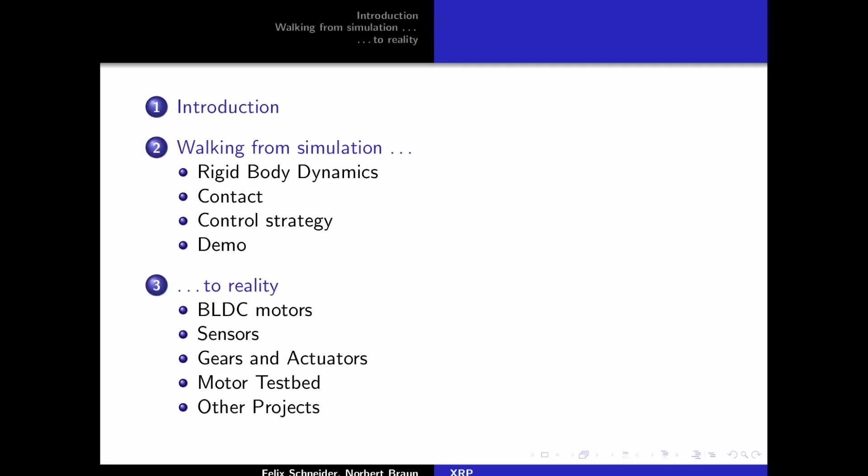The talk is separated into two main parts. In the first part, I am going to talk about walking in simulation. That is, we take a physics engine, build a model of the robot and try to get it to walk in the simplified physics with a few simplifying assumptions. And then in the second part of the talk, Felix will tell you about how we might eventually move from simulation to reality.

So this project is about building a life-size humanoid robot. And for the next years at least, we are going to focus on the legs. Arms might come eventually, but only much later.

There are, as was mentioned already, quite a few projects that are already working on this, but none of them are really fully open. So we try to make a fully free project, which is both open source software and open hardware. Also, we try to completely document the development process. The goal will be to have state-of-the-art software as far as that's possible, because software, of course, is easy to copy. And for the hardware, we try to focus on something that is manufacturable with moderate resources.

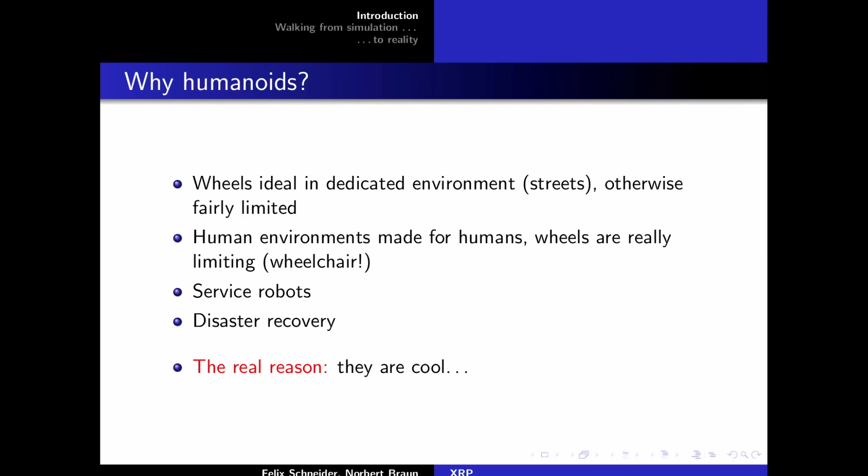Well, why would one want to have a humanoid robot at all? Wheels are, of course, good in dedicated environments. If you're on the street, you're not going to beat a wheeled robot, no matter what you do. On the other hand, human environments, such as this room, are really limited if you're on wheels. So, for example, there are stairs over there, you couldn't get on the stage without climbing stairs. So there are many reasons why wheels might not be so ideal.

If service robots eventually do become commonplace, these environments may change, but then at least if everything goes wrong and there is a disaster, you really need to have some alternative to wheels. But of course, for us, the real reason is that we saw these videos from Boston Dynamics, and we probably all saw them and we thought that's really cool. It's unfortunate that the military is doing it. Let's try to do something similar ourselves.

Well, it seems that the progress on humanoid robots after several decades is finally heating up. On the other hand, the big company players like Boston Dynamics and Schaft, which are now both owned by Google, are really secretive. So they publish YouTube videos that are really exciting, but don't really tell you anything. And there seem to be no scientific papers or anything.

There are also university projects that do publish papers, but still they don't actually publish usually source code, they don't publish CAD drawings, and they're not really intended for you to copy their hardware. They are scientists and they write papers, and that's about it. And the other problem is, of course, that existing robots cost on the order of several $100,000, which is completely unaffordable for a hobbyist. Now, our dream at the moment is to get this down to maybe a few €1,000, which is still a lot, but possibly affordable for a small group of people or hackerspaces.

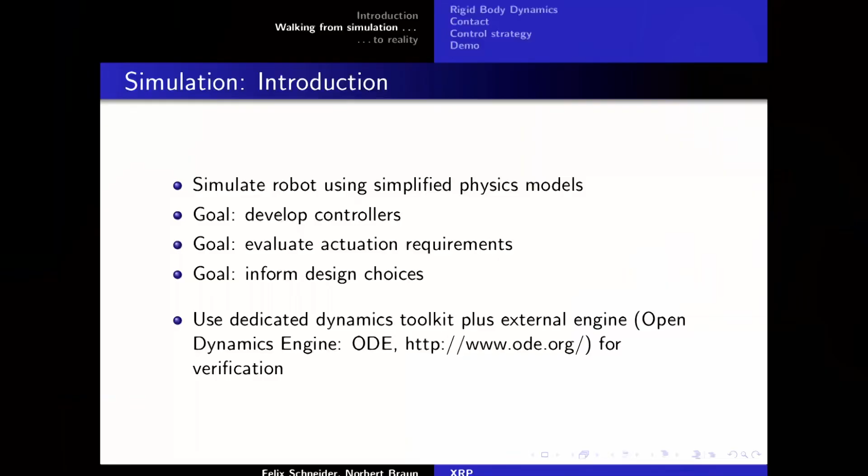So how do we simulate a robot at this point? This is really the basics of all the game physics engines you may know, such as ODE or Bullet. The central concept here is that of a rigid body, a physical body assumed to be completely undeformable. It can't bend, it can't flex. As a result, the mass distribution is completely condensed into 10 parameters, and this thing has 6 degrees of freedom. Except for those 10 parameters, the simulation engine doesn't care how the mass is distributed. This only matters for collision detection, not for actual dynamics.

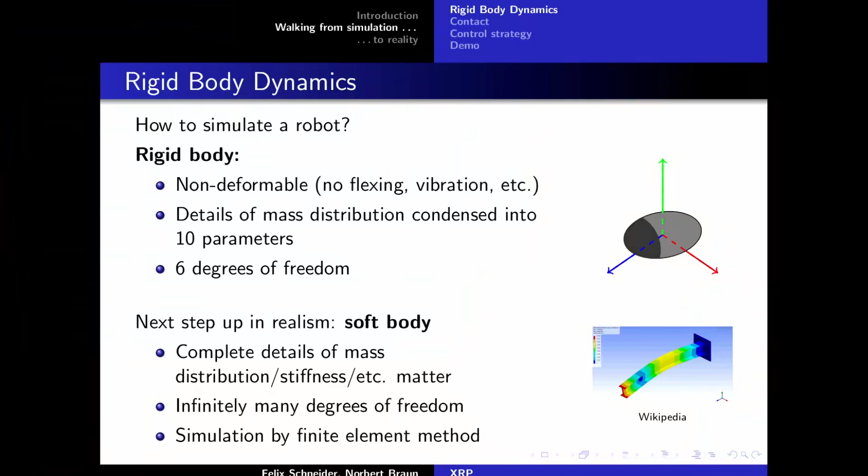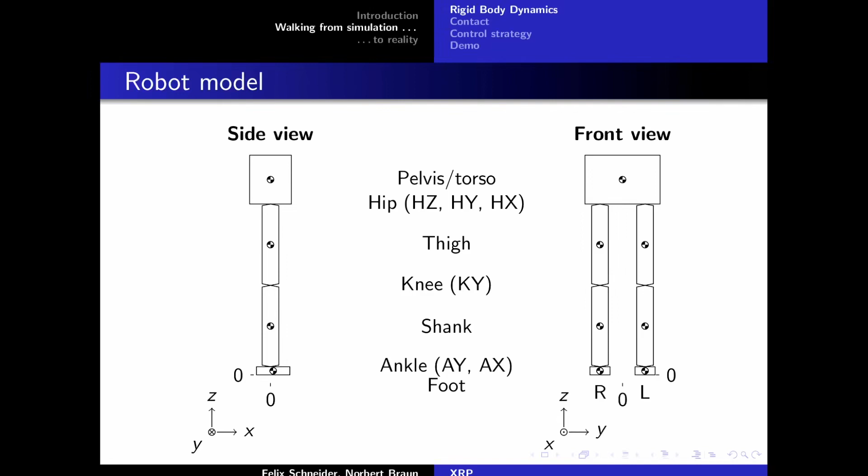So our robot is simulated as a collection of rigid bodies. This is the model we use at the moment. It consists of 7 rigid bodies: the torso, which is just one piece, and 2 legs. We have 6 degrees of freedom per leg - 3 in the hip, 1 in the knee, and 2 in the ankle. The advantage of this is that the rigid body that is the foot also has 6 degrees of freedom, so in this configuration we can essentially control the position and orientation of both feet, but not more. At the moment, this is sufficient for what we want to do.

Now let's come to controller design. Why is this even a hard problem? If you've seen 3D animated films, you might think this is really easy, or at least reasonably easy. Here's an industrial robot and a biped, and there's really a lot of work on industrial robots - the last talk was on this. What's the main difference? The main difference, as you see here, is that the industrial robot is bolted to the ground with rather large bolts.

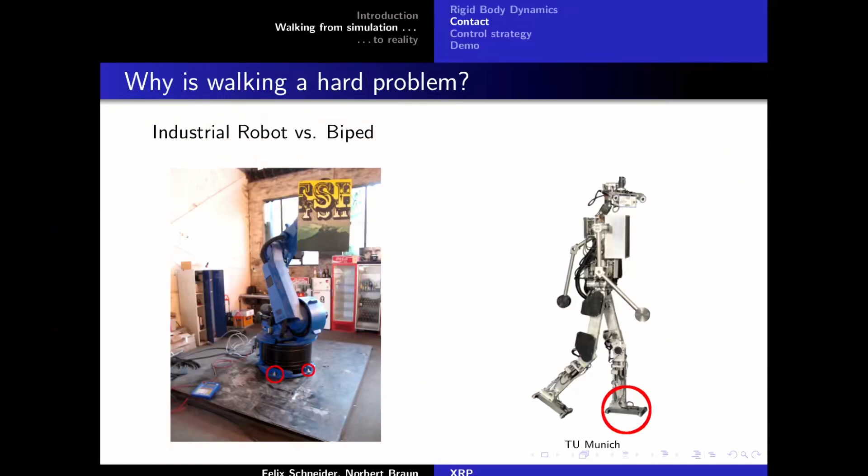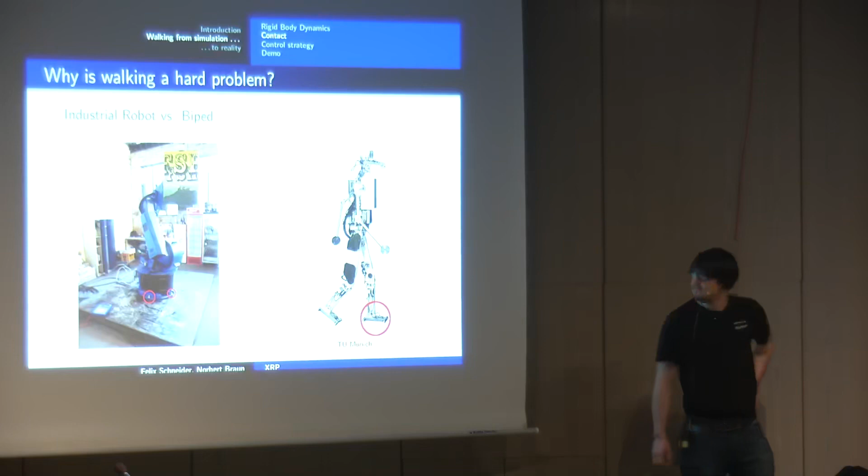And this is obviously impossible for a biped, because it can't screw its foot to the ground every time it wants to take a step. That's impossible, and this is what makes this problem hard. The thing is, for the industrial robot, you control all degrees of freedom - this is called fully actuated, and it means any trajectory can be followed.

This is, of course, not completely true - for industrial robots you then start to worry about collision avoidance and so on. But if the problem were as simple as for a walking robot, collision avoidance usually isn't a big problem on even ground. So this would seem to be trivial. But it's actually complicated by the fact that the stance foot is not fixed to the ground, and therefore the intrinsic dynamics begin to matter. It actually matters how fast you execute a trajectory, and you really can't take just any trajectory anymore.

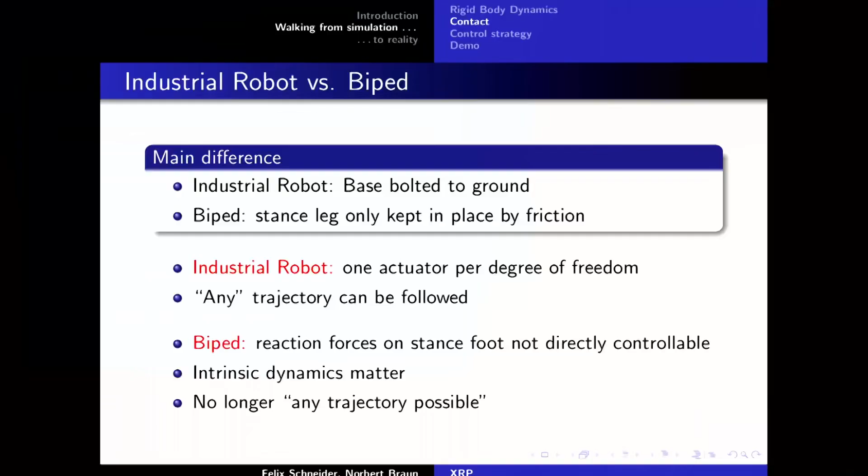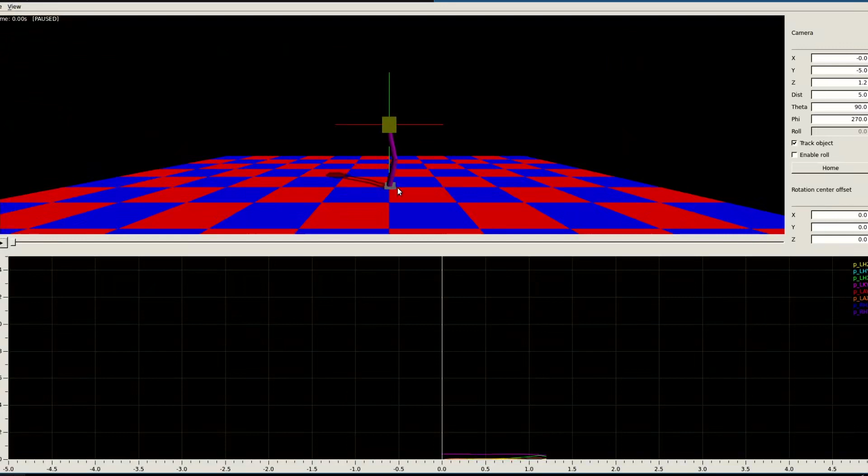So now if we take this and connect an actual physics engine, then we see something disappointing - namely, it fails, it just falls over. The thing is, the trajectory tracking actually works - you can see the joint angles in the robot more or less track the trajectories they had in the last simulation. But the big problem is that the foot, which we cannot control, just loses contact with the ground.

And this is exactly the kind of problem we need to worry about if we want to design a controller for a walking robot. See, it just falls over.

So let's do a little bit of physics here and talk about contact forces. Contact is in principle a complicated microscopic phenomenon, but there's one thing that's actually quite simple, namely that contacts are usually non-sticky. I illustrate this with this cartoon of picking up a box.

If I place a box, or something—don't have a box, but this pullover will do—on the table, it's actually pulled towards the center of the Earth by gravity, and the reaction force from the table just compensates this force, so the resulting force is zero. So by Newton, it doesn't move.

If I try to lift it up and don't quite succeed, the lifting force compensates a bit of gravity, and the rest is compensated by the reaction force, or contact force, and the resulting force is still zero.

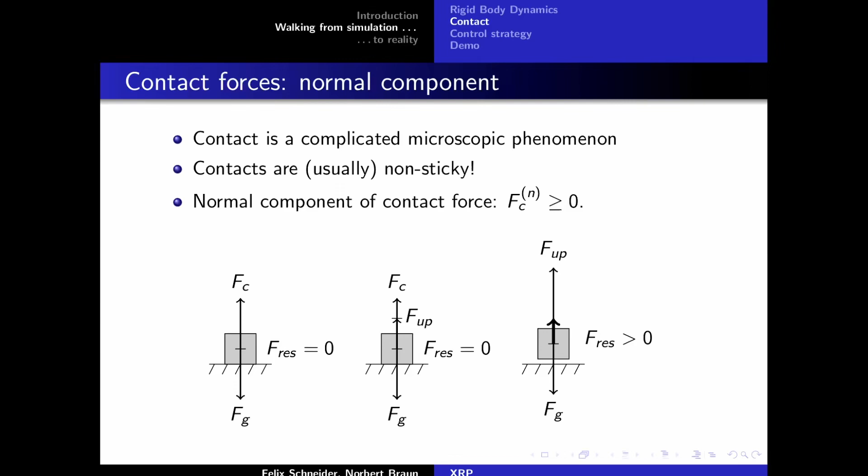But finally, if I pull upward with a large lifting force, then the contact force would have to be negative in this picture. This would happen if it were glued to the table, but if it's just a normal contact, then it can't, and it will just accelerate upwards, and I pick it up. This is really the central concept that happened to the poor robot in the last simulation.

Now let's consider multiple contact points. Of course, this is again a cartoon, and in reality you could have very many contact points, but let's suppose we have 4, and this is supposed to be a cartoon of the foot.

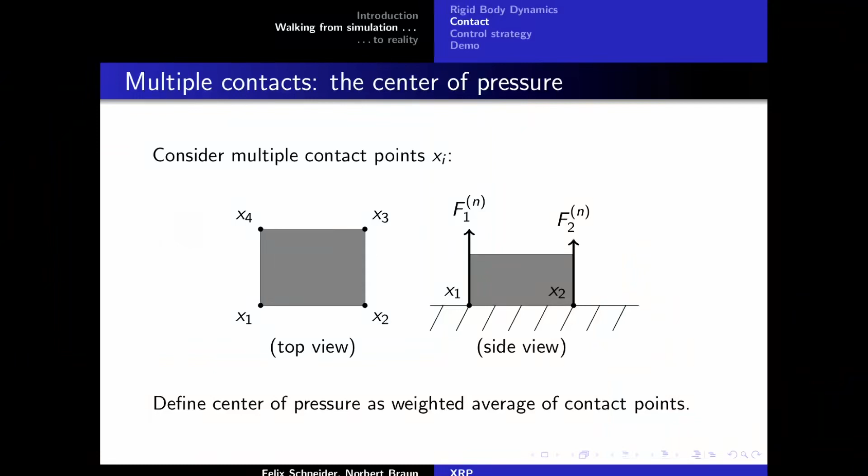Now, at each contact point there is a contact force acting. And we can now define the so-called center of pressure as the weighted average of all the contact points, weighted just by their contribution to the normal component of the contact force.

If all the contact force comes from x2, then xc is going to move closer to x2, and so on. We can write this with these weighting factors alpha, and the fact that these f_n's are larger than 0 implies that the alphas have to lie between 0 and 1.

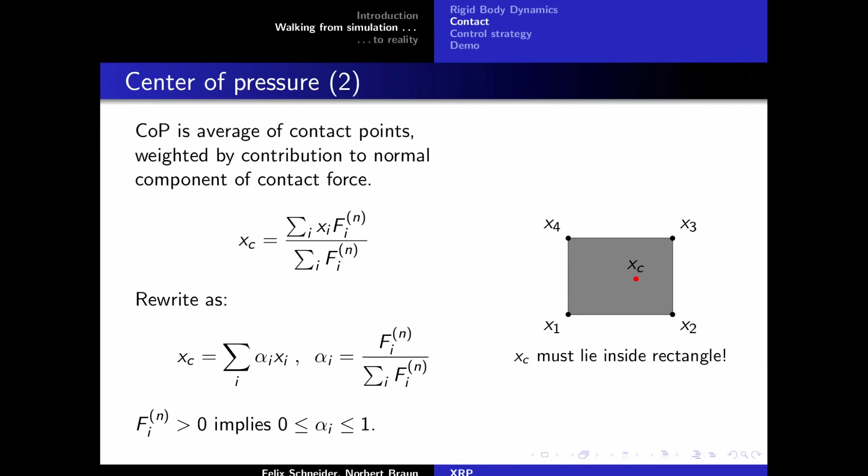Mathematically, this is called a convex sum, but even if you don't know what that is, it's really quite obvious that if we take a weighted average of these 4 points with weighting factors between 0 and 1, the average can't move outside of the box. That's really all there is to it, at least for the case of a box.

Now, this seems to depend on the microscopic details, and that would make it completely useless, because we can't hope to model these—we don't actually know the microscopic structure of the ground.

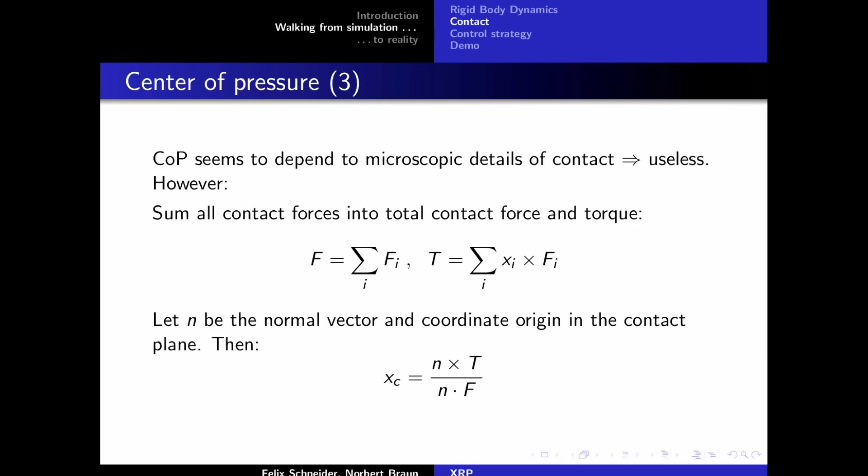But there's a magic trick, in a way: if we sum all the contact forces into a total contact force and a total contact torque, there's an equation shown in this slide that lets us calculate the center of pressure just from the total contact force and the total contact torque.

This is really nice because we can now look at walking, and usually the stance foot is just stationary. In this case, the contact forces have to compensate the reaction forces from the robot body. We can calculate the contact force, the reaction forces from the robot body, and get necessary conditions so that the stance foot has a chance at remaining stationary.

These conditions are, first of all, the center of pressure has to remain inside the foot, and second, well, it can't just pull up its stance foot like so. So the total normal component has to be positive with my choice of sign.

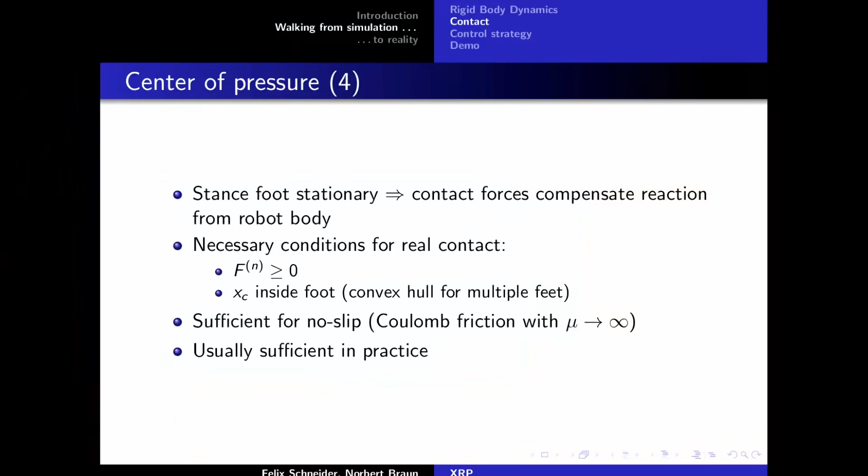Turns out that these conditions are sufficient for no-slip constraints—so if you can't actually slip on the ground, then these are even sufficient. And usually this is sufficient in practice, if you fail in the way you saw in the last demo.

And now we can actually say quantitatively why the last demo fails, because this is the center of pressure that would be required. And you see, this kind of walking would require feet that are huge, almost 70 centimeters.

This is not only unrealistic, but this can't work—they would collide. So this lets you know what really happens: the center of pressure goes to the dotted line and then stays there while the foot starts to rotate.

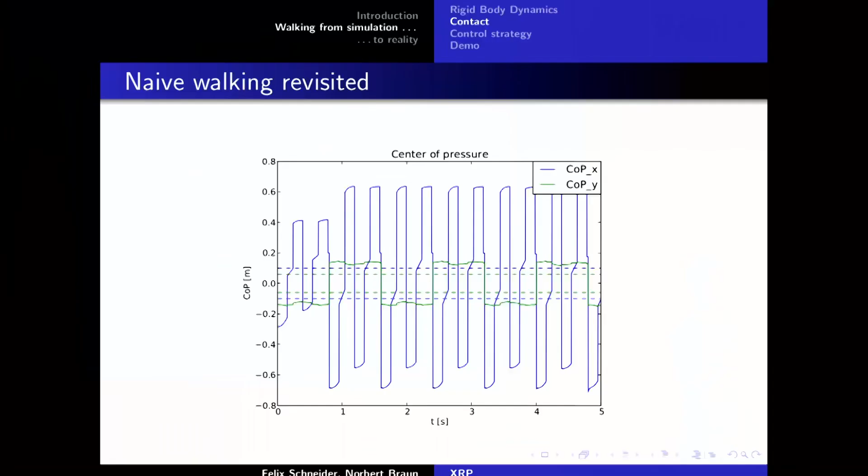So this can't work. Our new control strategy should focus on contact forces. Here's an idea: imagine the robot were floating in space.

You know from school that total linear and angular momentum are conserved, and this implies that your center of gravity trajectory can't be influenced. If you're an astronaut floating away from your space station, there's nothing you can do about it, because your center of gravity is moving away, and no matter what you do with your arms, you can't change that.

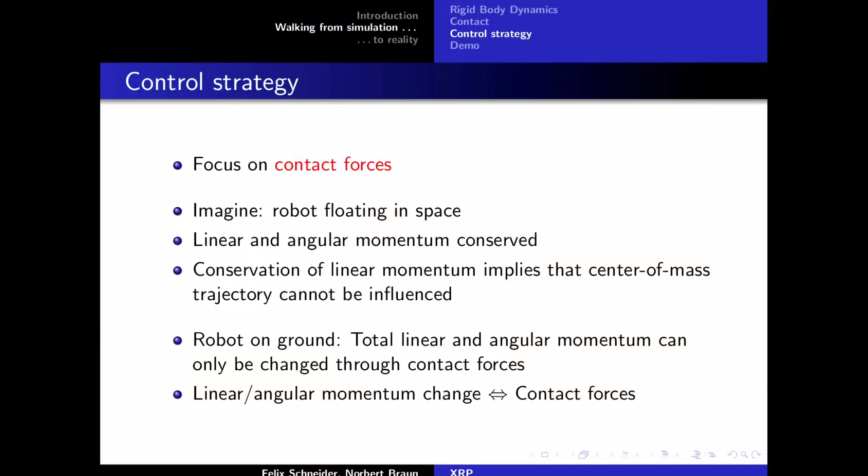On the ground, fortunately, you can do something about it, but only through contact forces. So there's a relationship between linear and angular momentum change on one hand, and the contact forces transmitted through the foot or feet on the other.

So we make a simplifying restriction: we assume the total angular momentum of the robot is just zero. This simplifies the equation, and then we're just left with the center of mass trajectory, from which we can completely determine the contact forces. In particular, joint angle trajectories only matter insofar as they influence the center of gravity trajectory.

We still have 6 contact forces—3 forces and 3 torques—and we have 6 equations: the angular momentum must not change, we have the center of pressure, and we have the height of the center of mass. Then we can solve a so-called boundary value problem to find the center of mass trajectory.

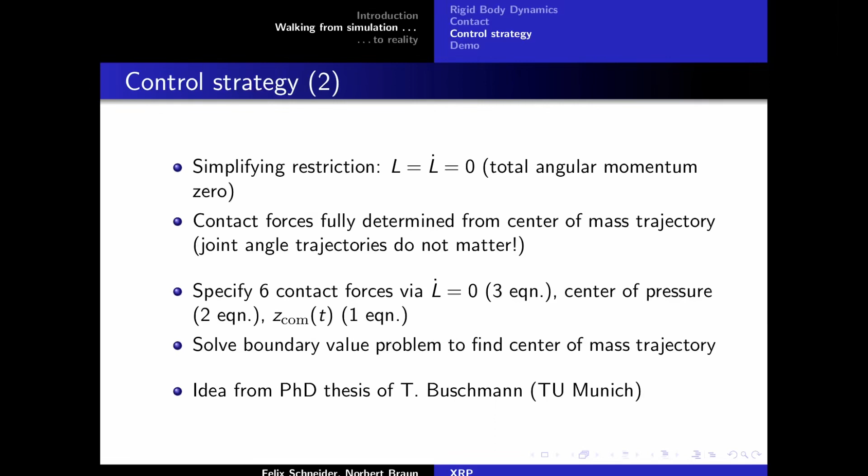This idea is from a PhD thesis from TU Munich. It's illustrated here: we assume the center of mass is at a constant height. Now we specify a center of pressure—this is the blue line—chosen so that it changes inside the legal region.

Solving the boundary value problem gives us the green curve. If we track this center of mass or center of gravity, it will generate these contact forces, which, as we chose them, are legal.

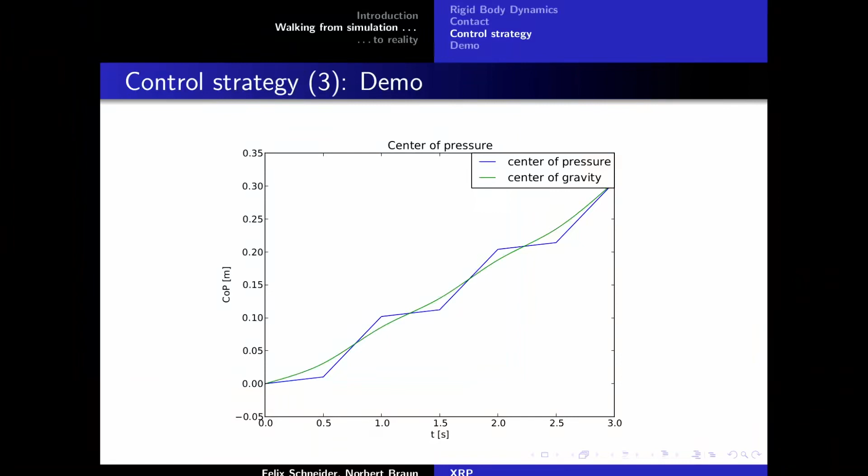Now there's one slight problem: we would usually have 3 boundary conditions but only a second-order differential equation. Because we are already walking, we have the center of mass position and velocity at the beginning, and we'd also like to specify the center of mass position at the end so it doesn't go completely off. We fix this to get the 3rd degree of freedom, just allowing our chosen center of pressure trajectory to be slightly modified.

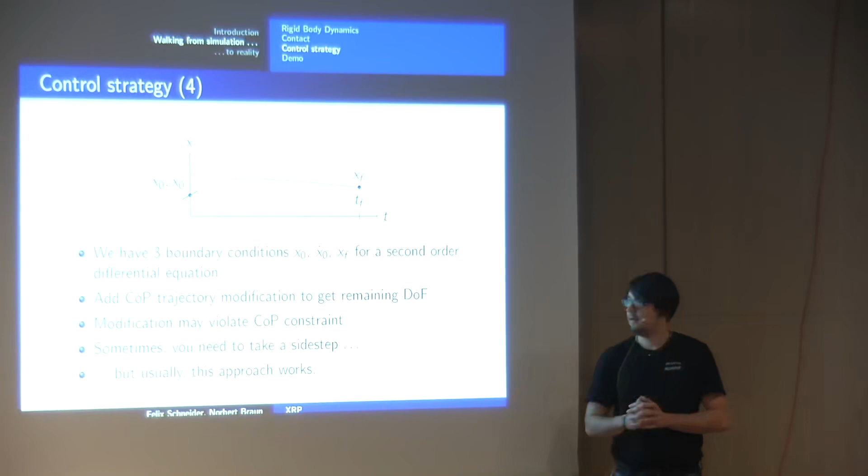The problem now is that the center of pressure constraint might become violated. What this really means is that sometimes you need a sidestep—if you're walking and someone pushes you, you can't just keep placing your feet as planned, you have to take a sidestep. This is really what this mathematics is telling you.

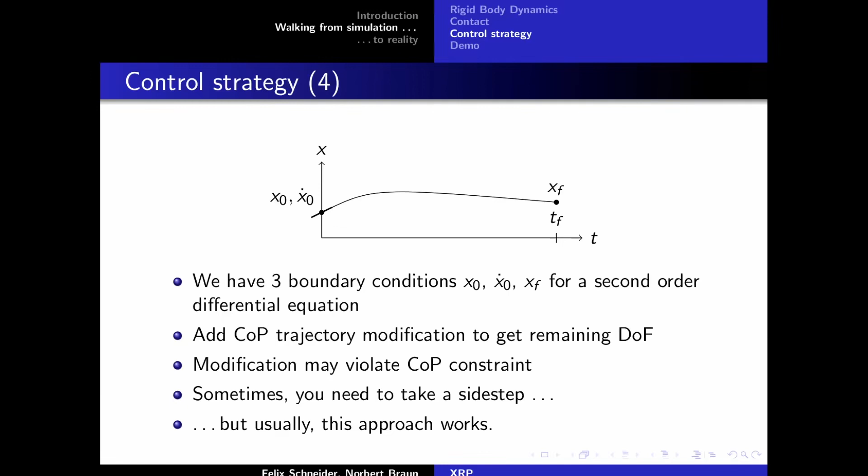However, usually—if you're not pushed, for example—this approach works quite well. In the last step, we take our full robot with its 12 joint space degrees of freedom and use so-called inverse dynamics to control the contact forces, and by this, track the center of gravity.

There are 2 cases, just for completeness—the next slide will be a demo, don't worry. So if there's only 1 leg on the ground, we have 6 contact forces again: 3 forces, 3 torques. We also have the swing leg in the air, which has 6 generalized accelerations: 3 translational, 3 rotational.

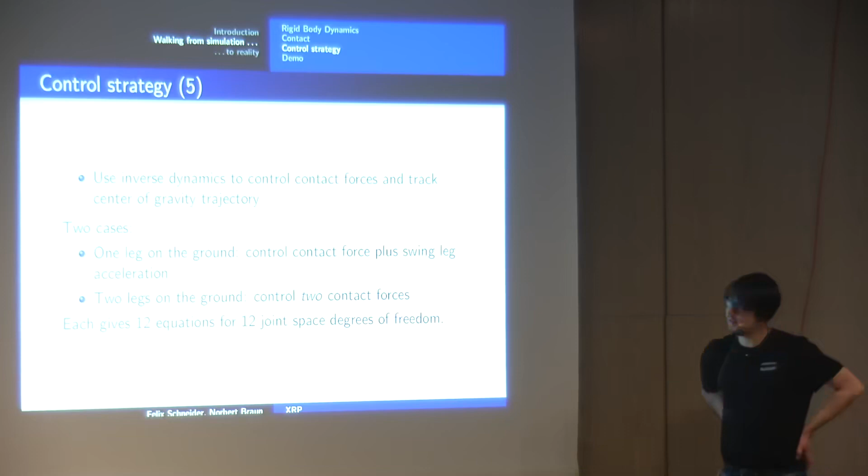If you have 2 legs on the ground, then we have 2 contact forces, 1 for each leg. In each case, we have 12 equations for the 12 joint space degrees of freedom.

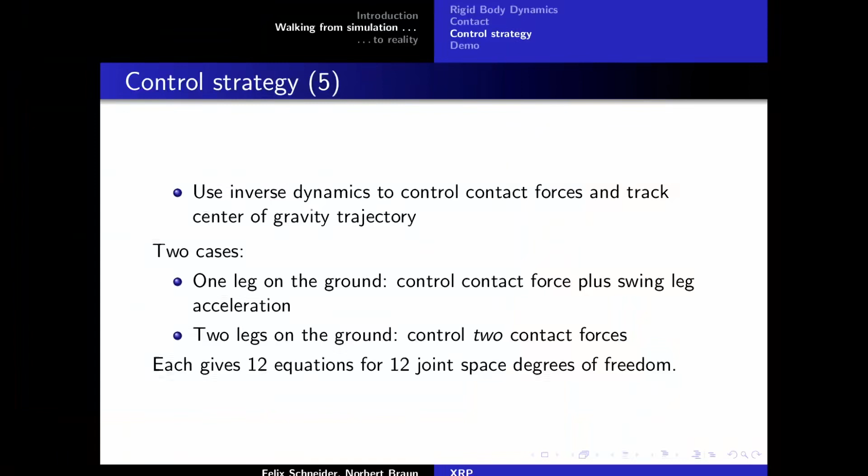Now this approach is actually implemented here. I just need to slightly play with my computer, sorry.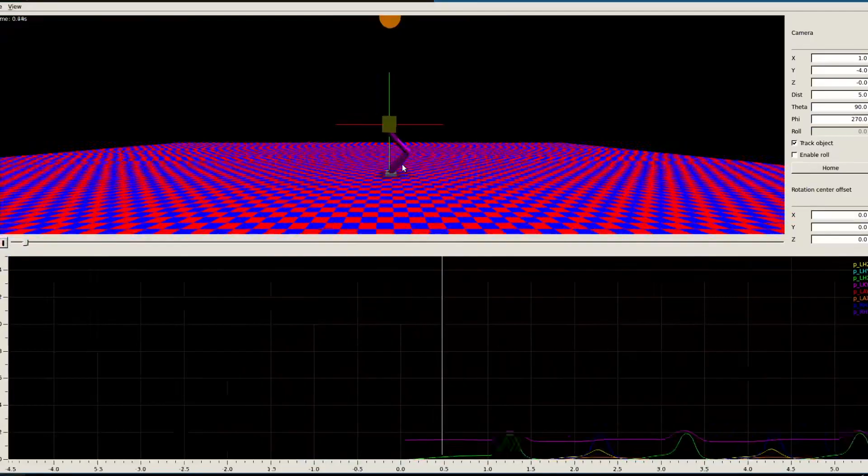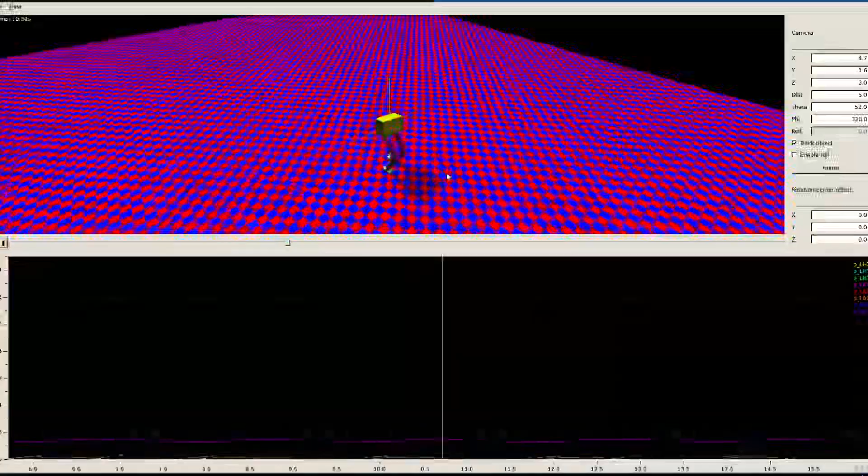So this is the first demo. This is now actually a physics simulation with contact enabled. As far as the physics engine is concerned, this is physically plausible. There are still some assumptions, but at least the contact is actually respected and works.

Torques on the order of 100 Newton meters, which is really a lot, and this is going to be the main problem really in the realization. Torque. We also need quite a lot of power, so we need on the order of 200 watts per joint.

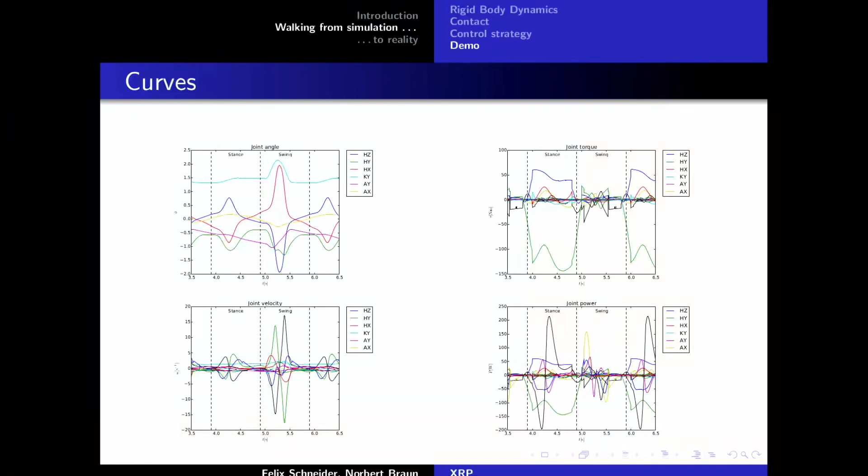Well, yeah, this will be a topic in the second part. So let's just summarize what we've just seen. We've tried to design a control strategy based on contact force management. The performance is quite okay. I mean, there are better results in simulation, but it's a start.

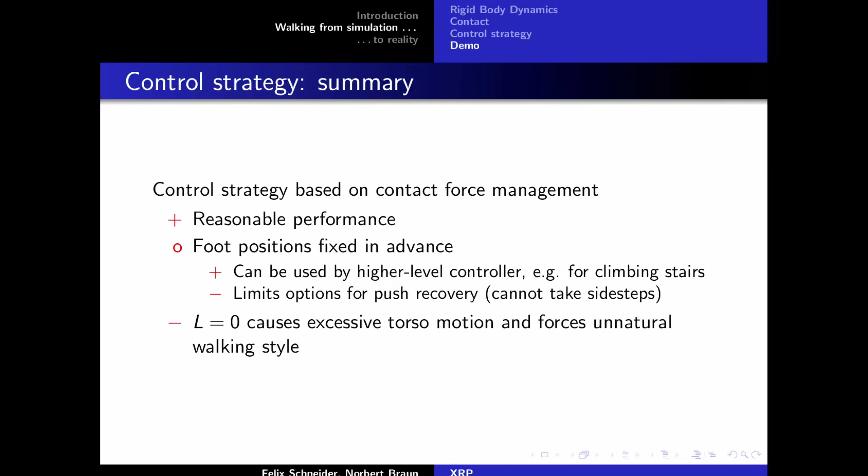One thing is that the foot positions for this controller are actually fixed in advance. So this could be used by a higher level controller to make it walk upstairs, for example, but it also limits the options we have for push recovery. The idea to take a smart sidestep is just not implemented in this kind of controller.

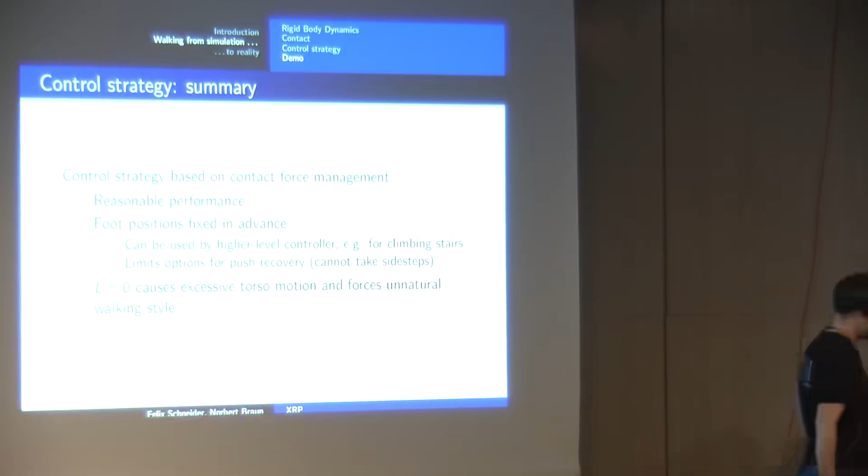Also, this simplifying restriction that the total angular momentum has to be zero causes this weird torso motion that you've seen in the video. One could try to fix this by adding arms, and then it would make this stereotypical walking style to keep the angular momentum zero. But at the moment, it doesn't do so much harm, so we could just leave it like this.

So regarding this last inverse dynamics part, we could, of course, just take the physics engine and treat it as a black box, and then use black box function inversion to get our inverse dynamics. But this is highly inefficient, and also numerically, it's a nightmare.

So what we do is we take this very nice book and look up some dynamics algorithms that are actually intended for use in robotics, and we implement them in a small library that will be released really soon now, together with the controller, so then everyone can play with it.

Also, one nice feature of the legs of our robot is that there are analytical inverse kinematics, so you can actually calculate without using iterative methods what joint angles you need to position the foot in a certain way. This is just a nice feature that somewhat simplifies the controller.

Now, in the longer term, these kind of handcrafted controllers that we had are okay for walking. But if you push really hard, or if the terrain gets really rough, or if you want to do acrobatics or whatever, then these kind of simplifying assumptions eventually break down.

And there is actually a large body of result where people just use large-scale simulation. So basically, you tell the computer, this is your starting state, this is your goal state, get me there. And this works offline quite well. It doesn't work so well if you have real-time constraints, because if you push, you can't actually stop to think, of course. Still, there are many interesting results, and eventually we are going to look into that as well.

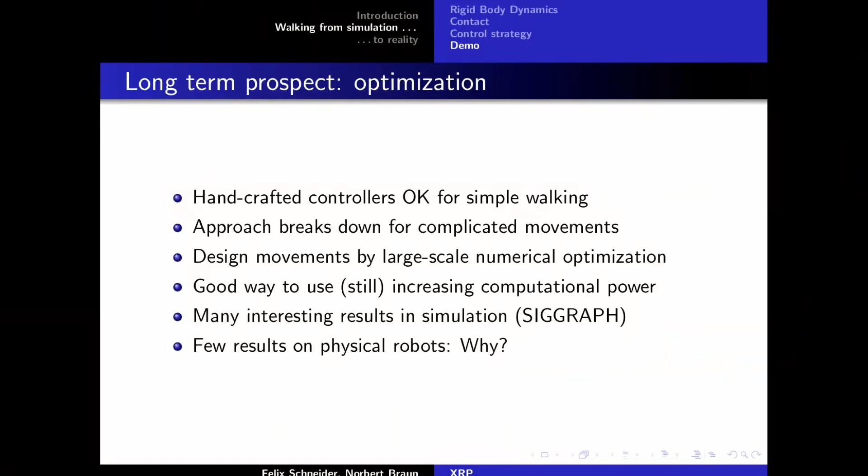But as a goal for now is to just walk on even ground. Well, it's probably easier to stay with these handcrafted approaches, not least because they're easier to debug. You can look at it and check if your assumptions are still valid and if everything works.

So that's it from my side. I summarize this crowded slide again, and these are now the requirements that Felix will have to deal with.

As Norbert showed you, the simulation gives us requirements for torque. So our peak torque is in the order of 100 Newton meters, which is quite large. It gives us a velocity requirement, so about 20 radians per second, and a power requirement, 250 watts.

So if you do the math, that won't match. That is because the peak velocity and the peak torque won't show up at the same time. So on the motor side, the mainstream option there is brushless motors.

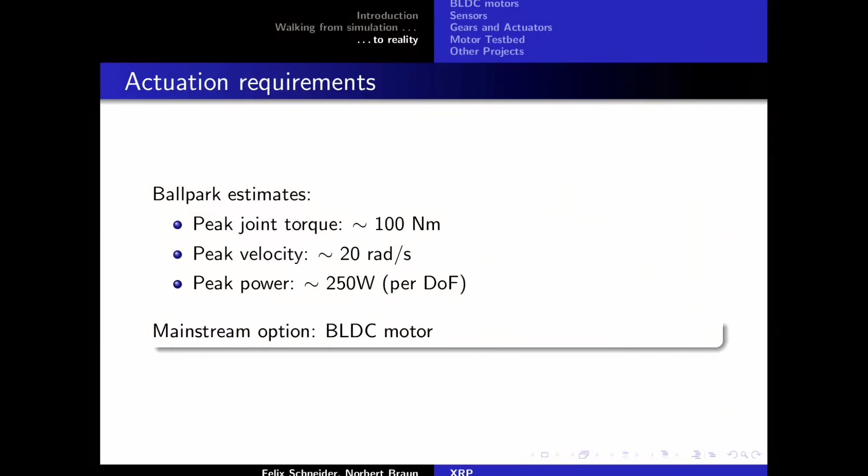Because we cannot afford industrial-grade motors, we go to our favorite RC site, cheap, shiny stuff, and found this 2 kilowatt brushless motor for $30. It is quite heavy, but manageable, 500 grams. A bit overpowered, but slow.

270 kV. kV stands for basically how fast the motor would turn in idle per volt. If you do the math again, 850 radians at 30 volts, and approximately 3 Newton meters at 90 amps. So that gives us a gear ratio of 1 to 50.

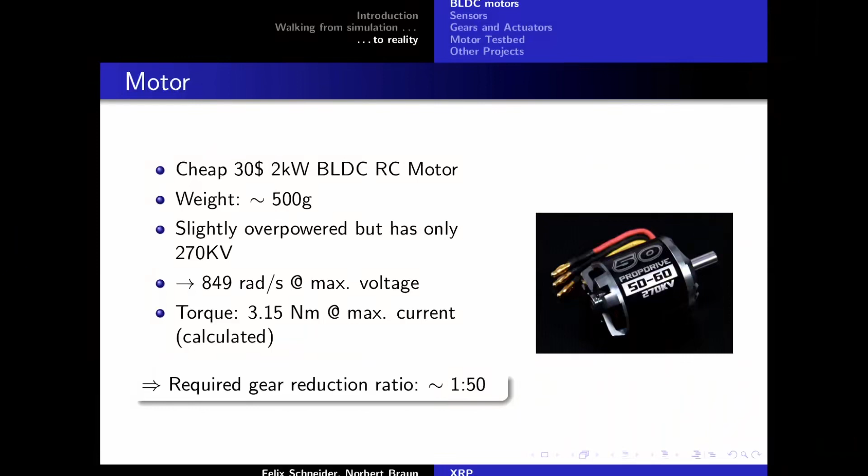We get to the gears later on. If you have a brushless motor from the RC environment, you usually power your plane with it. So you can control direction and maybe speed with the usual affordable brushless controllers, but not position. And we want position control here.

So we implemented our own brushless controller which is encoder-based. There's a sensor on the rotation axis, and it uses a thing called space vector modulation, which is basically three-phase AC phase-locked to the motor rotation. Think of it like microstepping for stepper motors.

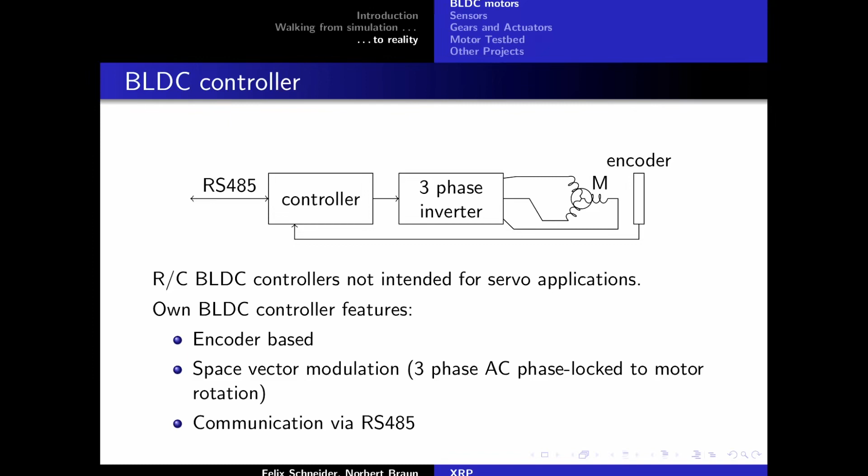And as we are switching high currents there, 90 amps, we are using RS485 because it's differential.

The power stage is actually from a cheap Chinese brushless controller. They were kind enough to put headers on it, 2 millimeter pitch, but headers, and you can just unplug it from the cheap SI Labs microcontroller and use an STM32, and build a nice new baseboard for it. And if it ever breaks or burns, just pay $20, get a new one, and hope they don't change the design.

So as we're trying to control the torque, and the torque is proportional to the current, we need to measure the current of all phases, or at least 2 phases, because you can calculate the current for the third phase. So we use 150 amp Hall effect sensors, a nice model from Allegro Microsystems, the ACS759. If you ever need current sensors, use them.

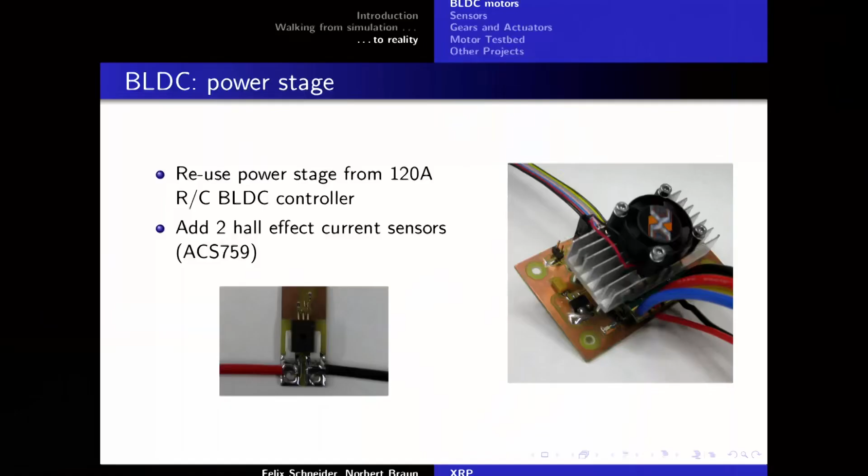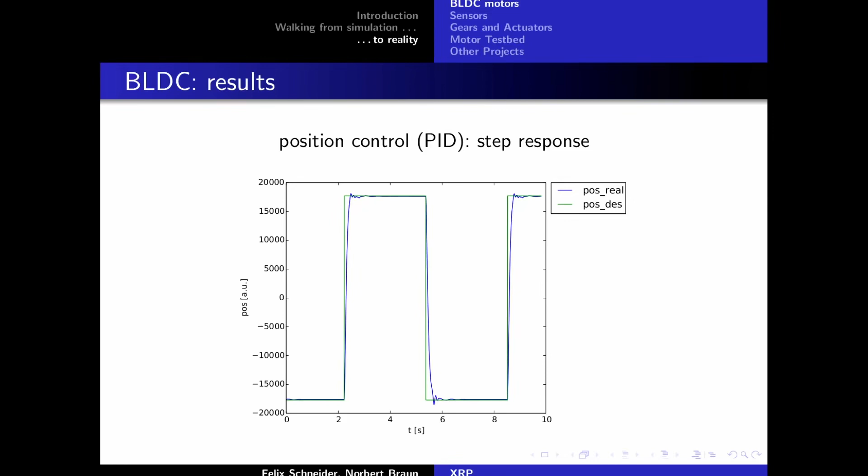This graph shows how fast the precision tracking is actually working. It basically shows on the y-axis the position in sensor units, and on the x-axis its time. As you see, tracking is quite nice. Blue line is the real position, green line is the desired position, and there are no major overshoots despite the mean square wave.

So speaking of rotation sensors, Austria Microsystems builds nice Hall effect sensors. They come in 2 flavors, absolute and relative. A 12-bit absolute resolution is quite nice, but not enough. So they build rings with 128 poles, and you interpolate between 2 poles. It's not absolute anymore, but pretty accurate.

And if you combine both, so on one axis, one absolute sensor to basically index the relative sensor, you gain a 17-bit absolute sensor, which is, at least in theory, I mean this is calculated, not measured, really, really accurate. And each sensor is about $10, and the magnets are $5 each.

Another nice thing about those sensors is that they have direct quadrature output, and all the modern microcontrollers have direct hardware quadrature inputs or decoders. So you can just read the register and see the value of your sensor without any decoding protocols, whatever. A problem, though, is that we don't know how nonlinearity will work or is a problem in

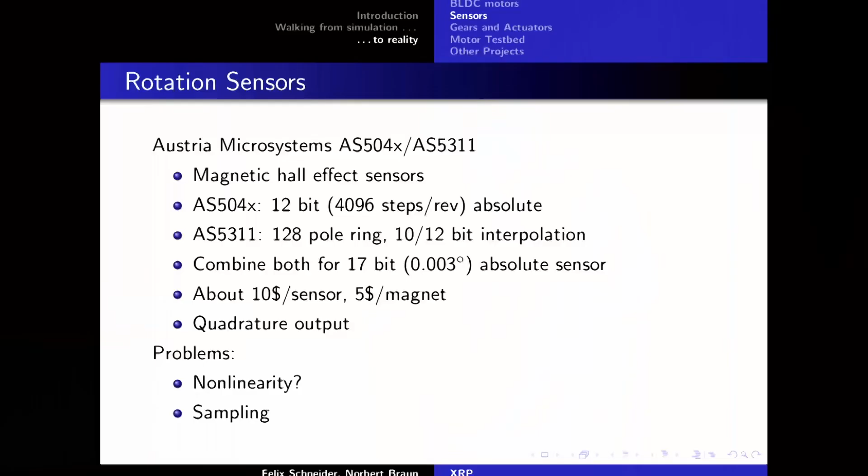Now back to gears. 100 Newton meters is really a lot, because if you just use your usual cordless screwdriver, they claim they can do like 50 Newton meters. You will probably never reach that. You need like 30 Newton meters to screw a screw into really hard wood.

Our motor torque is around 2 Newton meters, because we only calculated the Newton meters, the motor torque right now, and we need a reduction of 1 to 50 maybe. That leaves us with not too many gearing options.

One gearing option is a fancy thing called harmonic drive, also called strain wave gearing. It's quite a nice thing, but it's darn expensive. One is probably starting at $1000, they are really expensive. And planetary gears are cheaply available, for example, in your cordless screwdriver, but have different...

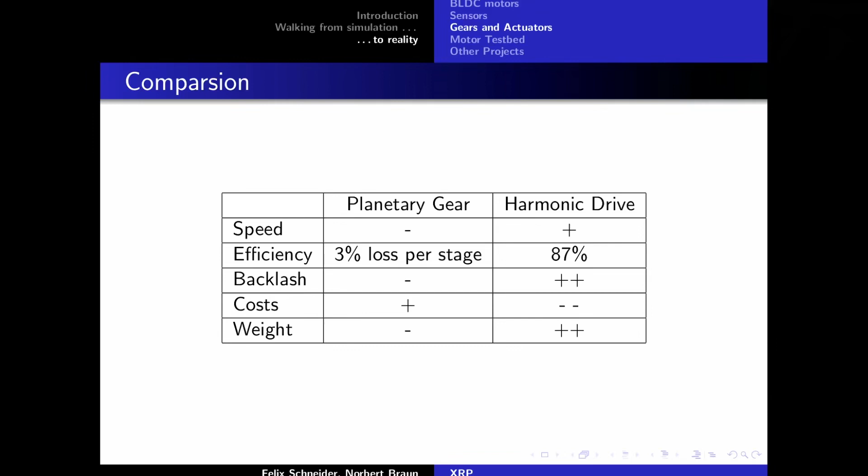Gears have backlash usually. So if you turn the motor in a different direction, there will be play in the gears, and that can break things, because if the gear spins freely with that torque, usually teeth just break from the gear. That isn't a problem at all with harmonic drives, and harmonic drives are expensive, but we try to get away with planetary gears.

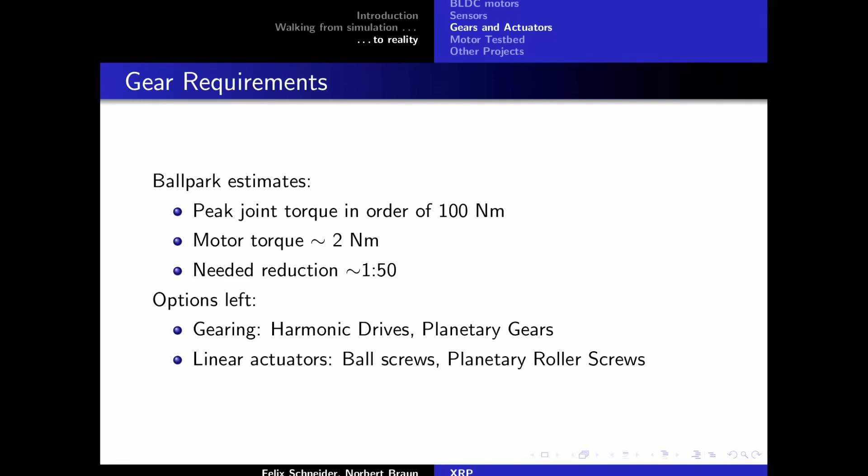There is one more actuator system: a linear actuator. It's basically like hydraulics, but without hydraulics. You use a screw. The most common things are ball screws, and then there's a fancy thing called a planetary roller screw, which has a planetary gear built into the screw. We won't go into details here, since it's a talk for its own if you're really interested.

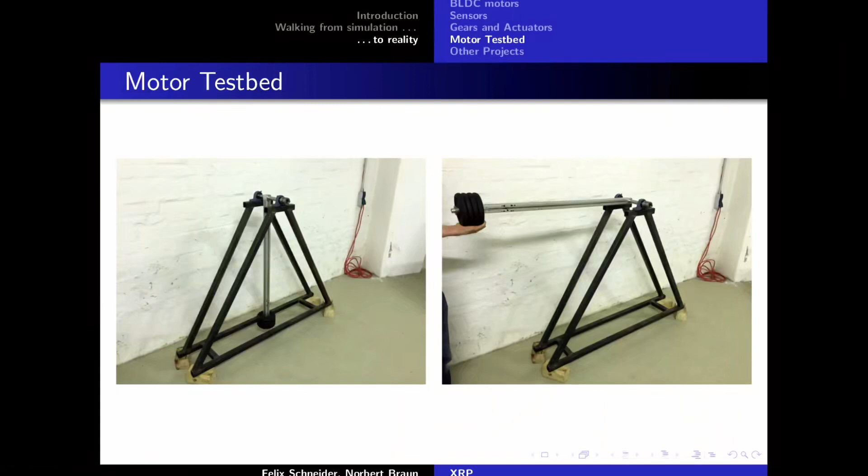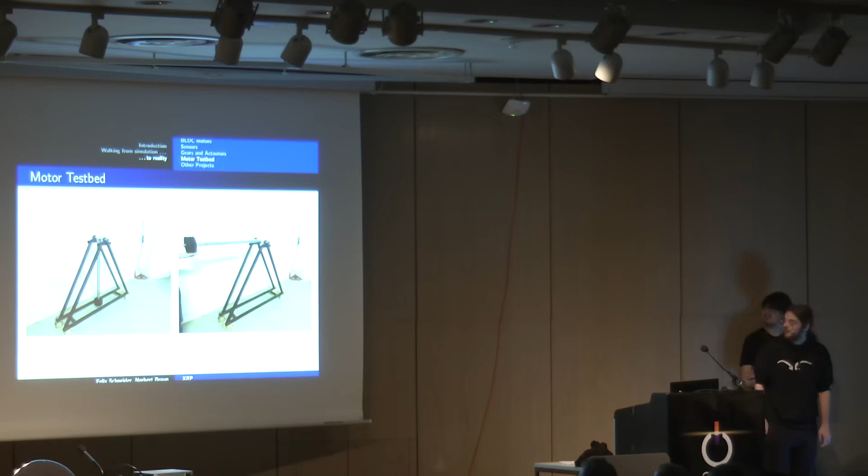To test all this, we've built a motor test bed, which is basically a giant pendulum: a 1 meter long pole with 10 kilograms of handlebar weights bolted on. If you do the math, the static torque is up to 100 Newton meters to test everything we want, and the dynamic torque can obviously be much higher. It has 2 ports, one for axial motors like harmonic drives and planetary gears, and one for linear actuators like ball screw systems. As soon as we have the first tests, we'll probably post video material of breaking gears, motors, and controllers, and everything will burn.

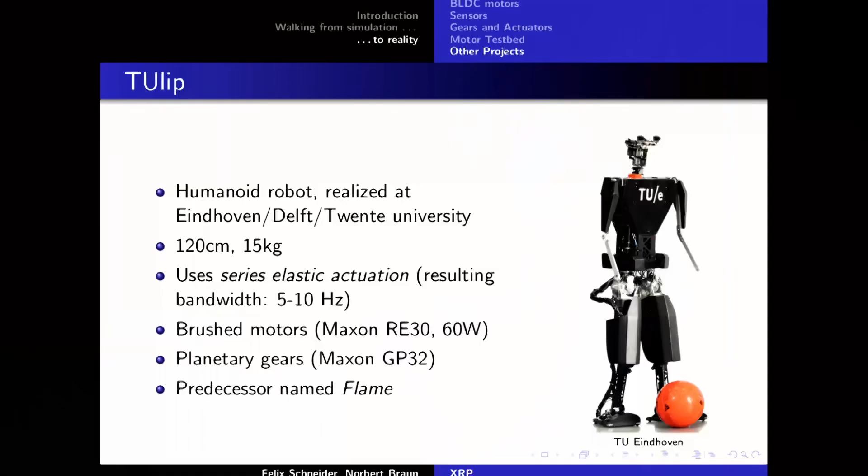We also had a look at what exists in the academic field right now. Two sample projects are Tulip and Lola. Tulip is from a university in the Netherlands, the University of Eindhoven, Delft, and Twente, and it's rather small, 120 centimeters, 15 kilograms. It uses an interesting concept called series elastic actuation in the knee, which means they couple a motor with a spring to conserve energy during foot contact, loading the spring during foot contact. But they lose bandwidth with this, so the controller is only 5 to 10 hertz fast. They get away with brushed motors because they're light enough, plus planetary gears, and they have a predecessor named Flame, for which I'll show a video shortly.

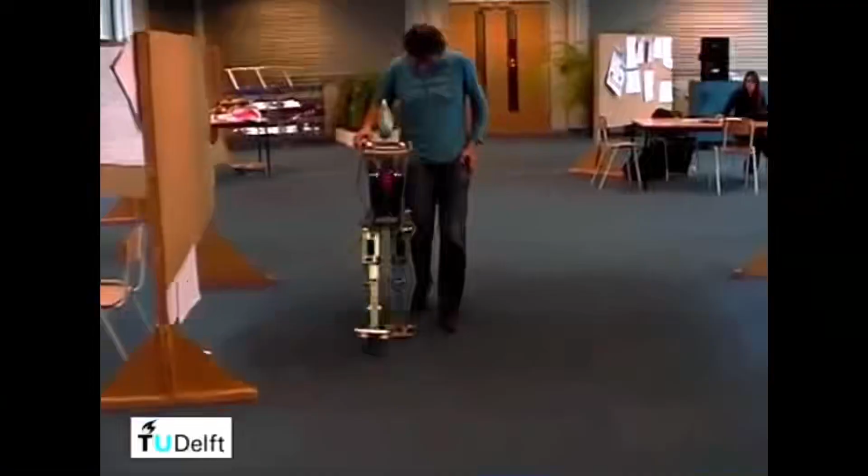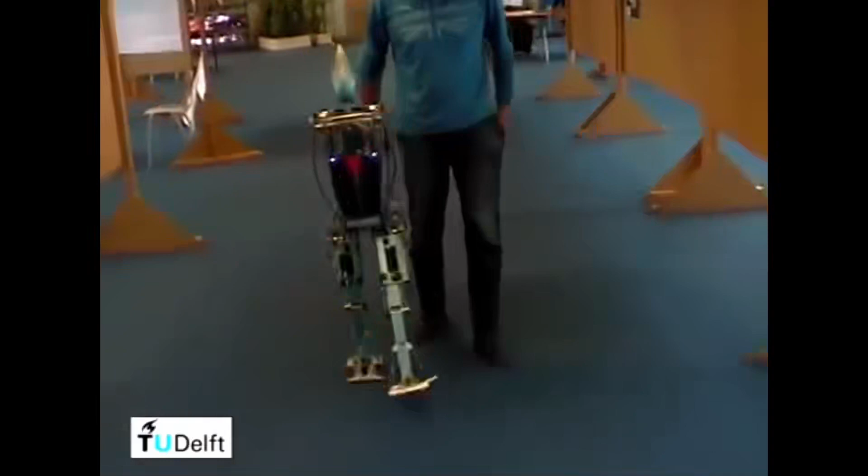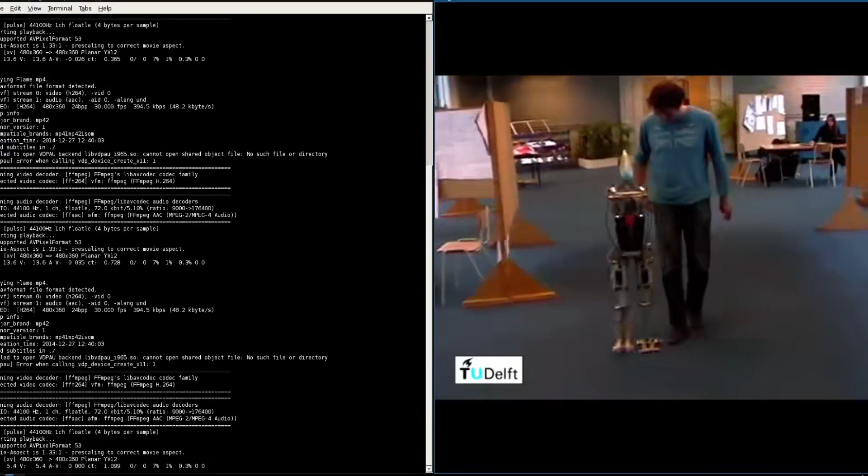As you can see, Flame moves in a slight curve. That's because, as the predecessor of Tulip, it's missing 1 degree of freedom in the hip. It has only 2 degrees of freedom in the hip, which means it can't control its movement around the z-axis, the rotation around the z-axis. As a result, it moves in a curve because it can't control that.

Next up is Lola. Lola is a fully sized humanoid, 180 centimeters, 55 kilograms, built at TU Munich. It has really many degrees of freedom, 25 in total, with the arms and head actuated as well, and 7 degrees of freedom per leg.

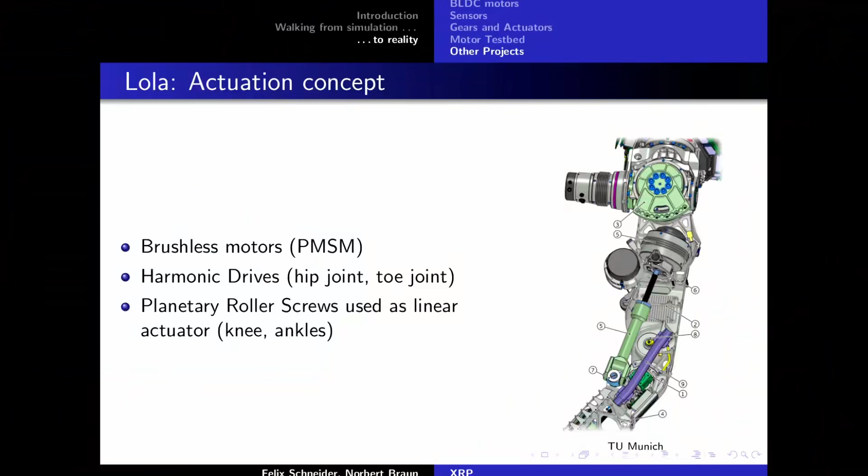The actuation concept with all degrees of freedom is shown here. Basically, at least for the legs, it's comparable to Tulip and our approach, with the exception that they have an active toe joint. They claim this is useful to walk faster, which isn't an actual target at the moment, and to climb stairs and steps, which would be nice but should be doable without it as well.

As a special feature, the hip z-axis is tilted against the XY plane. You can see that in the kinematics. We have a video for this as well.

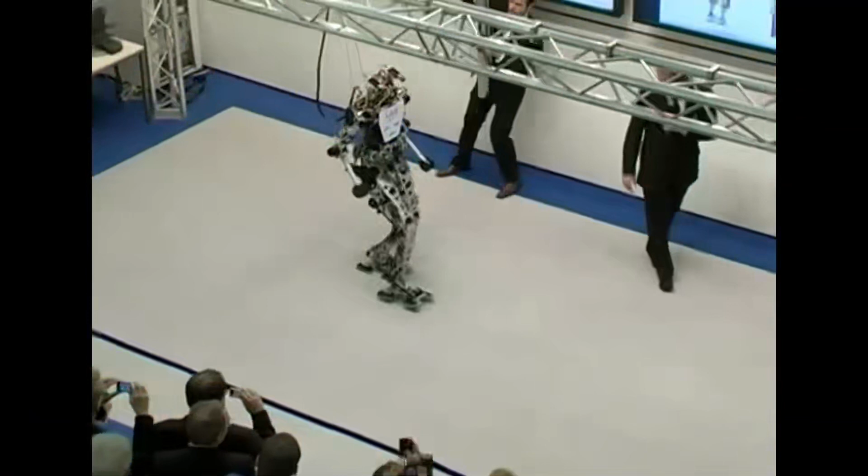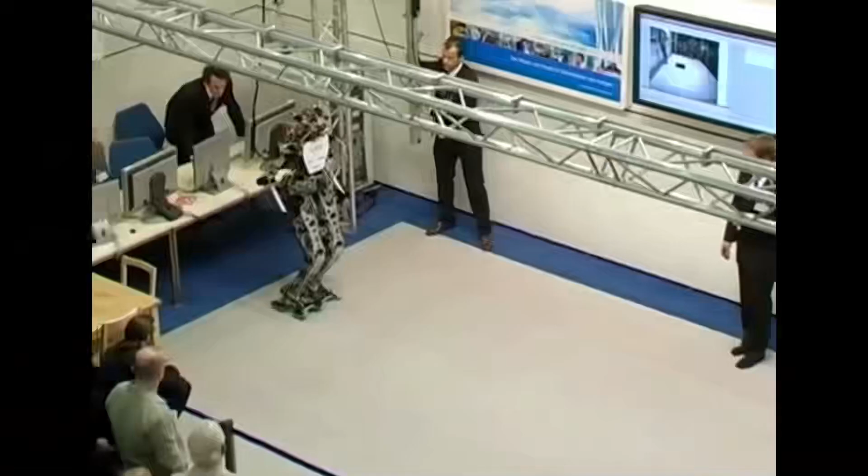So this is Lola, and as opposed to Flame, Lola never has straight legs, but always bent knees. That's because Buschmann, the guy who wrote the controller for Lola, is who we based our controller work on. It has arms to conserve angular momentum, like Norbert told you earlier, which looks way better. But we're only starting at this point, so we'll do that later on.

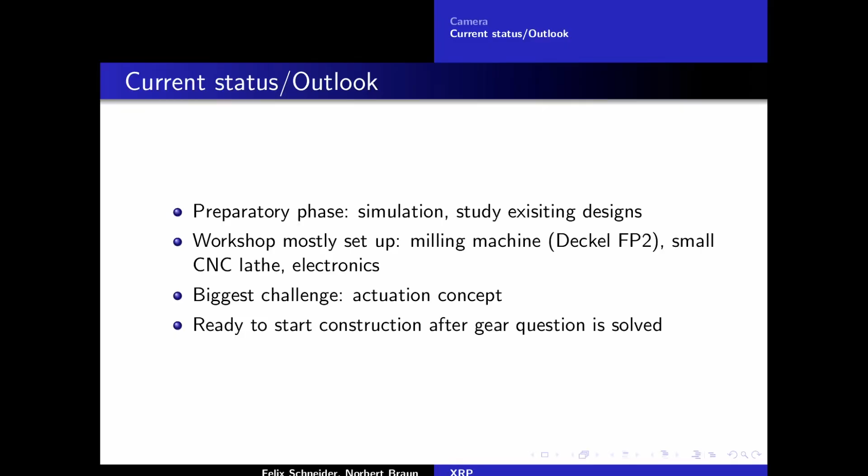So the current status is, simulation is on a good way. We studied existing designs. We built a workshop in the last year with a milling machine, a small lathe, and a fully fledged electronics workshop. The biggest challenge right now is to get an actuation concept that you can pay for. Next steps next year will be to burn motors, burn drivers, and test gears. After the gear question is solved, we will start constructing our first pair of legs.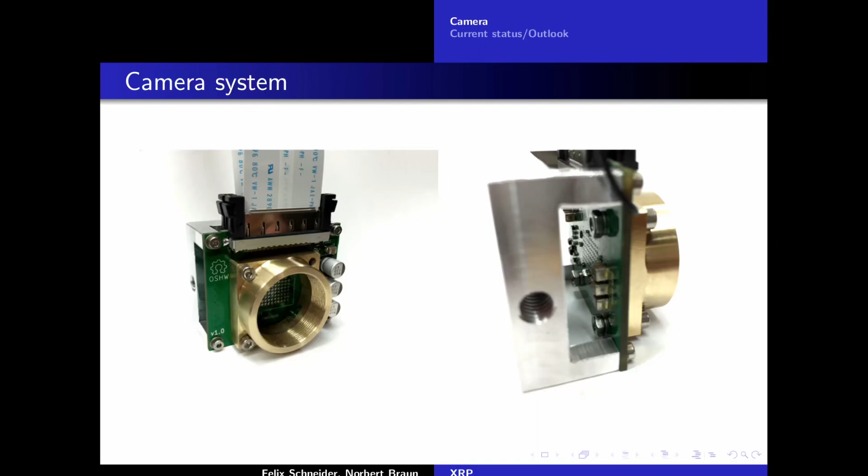Additionally, in the last demo Norbert showed you, the terrain was known to the robot, so we began building a camera system. This is the camera with a C-mount, for whoever knows what that is. It's a scientific camera based on the Apertus project, who built a fully open source film camera in 4K resolution, which is quite amazing.

It's based on a CMOS sensor with 2K resolution, so full HD, up to 340 FPS, 12-bit dynamic color depth, and it has a global shutter, so not like on your favorite GoPro video where you see the prop of the plane flexing all over the screen. It takes the image of all pixels at the same time.

And additionally, all the design files are available on GitHub. If you know KiCad, you can just open it. We have it with us, and we'll hack on the firmware for the rest of the event. And that's it.